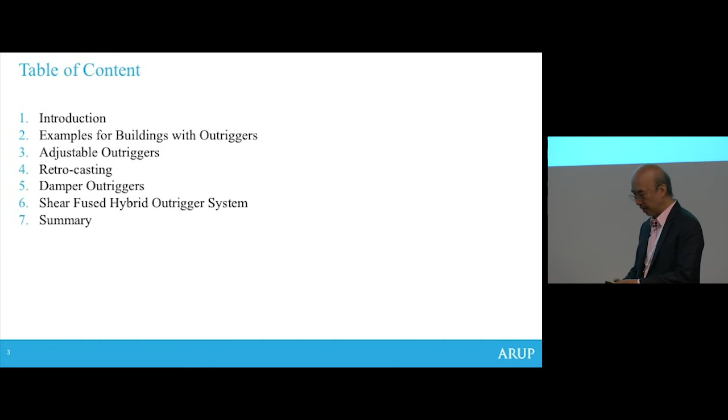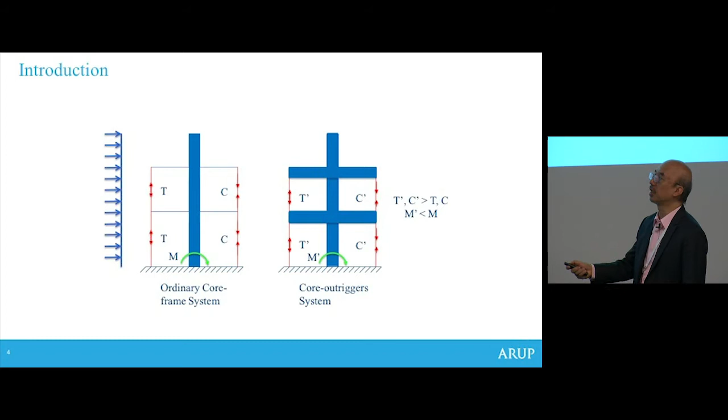This is what outrigger means in the case of a core. You apply a lateral load, and this creates moment, shear force, tension and compression. If we have a very stiff arm, increasing the stiffness of these beams, we'll see an increase in tension and compression force, and the moment in the core will be released.

With this system, we can mobilize the perimeter structure and at the same time reduce the moment force in the core, allowing us to reduce the core size and control and increase stiffness. You can see the force and moment relationships in this simple diagram.

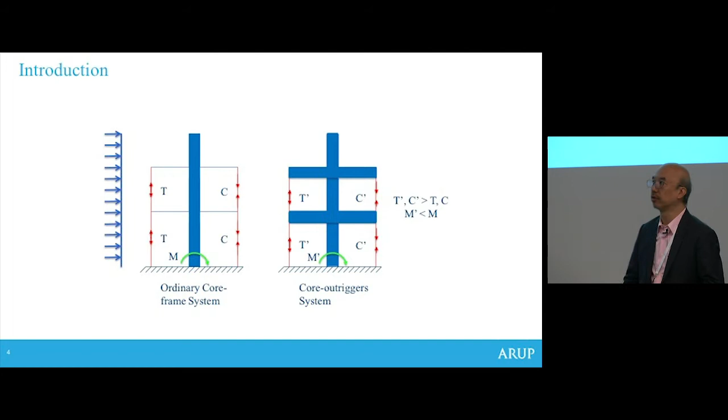This is the moment curve for the original system—if you don't have an outrigger, just a pure cantilever. With a cantilever and coupling from the perimeter structure, you actually reduce the moment in the core. This line is parallel—you can't make it unparallel, it stays parallel.

You have M1 and M2, and this is the simple equation showing why the moment at the base of the core is reduced by the amount M1 plus M2. You can consider whether you want multiple outrigger systems along a tall building, with M1, M2, M3, M4, M5. The total base moment should be reduced, but it cannot ideally go down to zero.

We also need to think about whether the system should have 2 outriggers, 3 outriggers, and what the stiffness of the outrigger should be. The stronger the outrigger, the larger M1 or M2, meaning the amount of reduction will be greater. But putting more investment into the outrigger means you might need a thicker core. It's always an optimization study, depending on requirements.

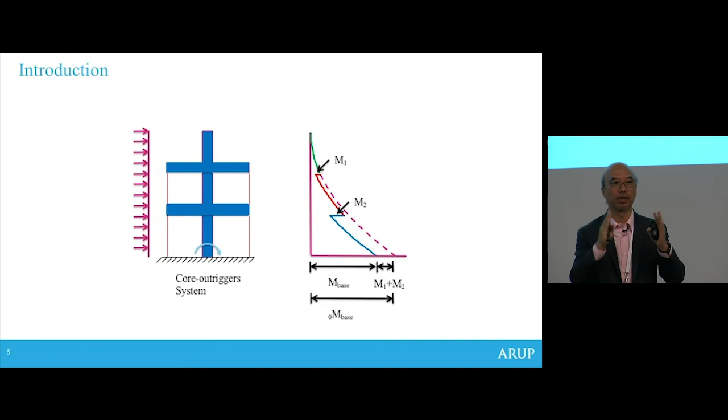Sometimes you want a mega column—a stronger column—to reduce the core. You want to control stiffness through the perimeter structure, but keep it to a minimum. This means you can adjust so the outrigger isn't very stiff, resulting in a thicker core, but the perimeter structure ends up slightly smaller in dimension.

For example, a lot of past studies discuss the location of the outrigger—what's the ideal location? Probably 1/3, 2/3, or whatever. But in reality, it's not a structural engineer's choice—it's always commercially driven, typically located at a refuge floor or mechanical floor.

So my previous research wasn't about where to put the outrigger, because that's been studied before, and with my experience, it's not a structural engineer's choice anyway. My study instead focuses on what is the best form of outrigger.

This is a control of a double-story high, 13-meter long span structure from the core to the perimeter, 4.2 meter floor to floor height. So it's double-story high. This is typical, but sometimes for some structures we actually have a triple floor, to make it much stronger. If you have a one-story high, the answer may be slightly different, but the outrigger will not be very strong. So for this one, it's this geometry, this constraint condition.

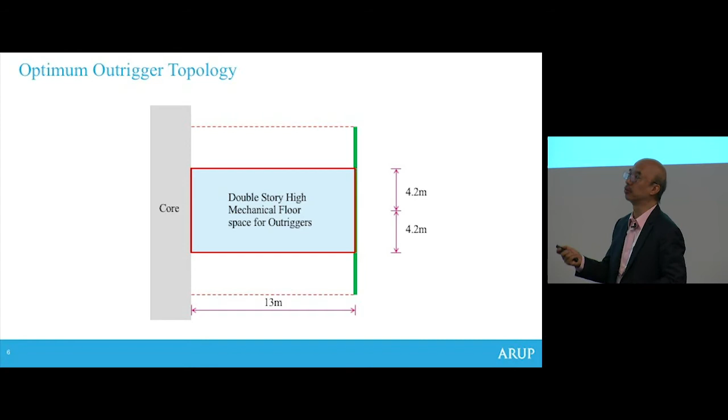And then I study a couple, 1, 2, 3, 4, and also 5 and 6 and so forth. But what I'm going to show, if you look at the paper, basically a study that for this one is probably in terms of material the minimum. In terms of stiffness it's not the strongest, but in terms of strength it's the strongest.

It's just because for C and D, basically this is like a dummy. I just want to show it's like a dummy. For C and D, basically all the focus, the failure are only on this member. The utilization on the other members are very low. So basically, although we can have a stiffer structure, in terms of total utilization of material, they are not.

Unless we adjust the size. I'm using a uniform size for this study.

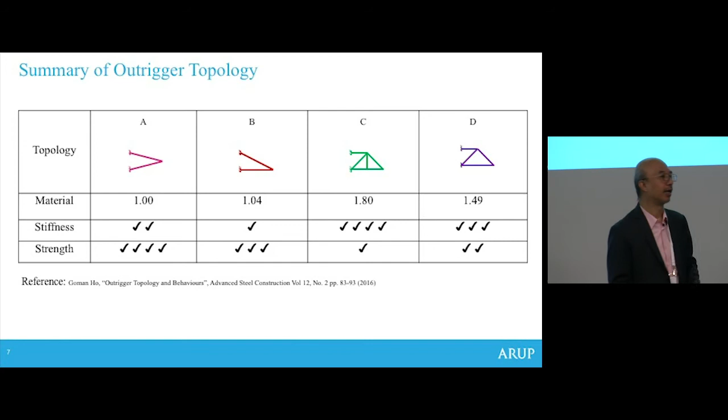But sometimes in the wind control condition, which I think will be probably most tall buildings in Australia, what you're looking for is a very stiff outrigger, because you don't have a seismic consideration. But in seismic regions, sometimes we need to struggle between whether we should design for wind and use a very stiff outrigger, or use a flexible outrigger - what you call flexible, or soft sometimes. And this is always a choice of the engineer and also the condition.

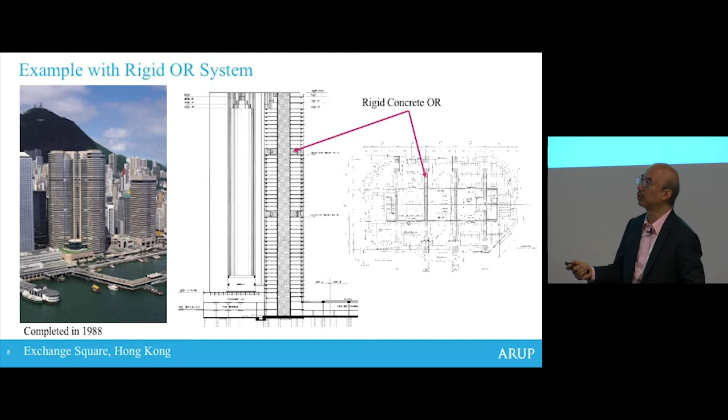In terms of rigid outrigger, this is one of the examples - we have done Hong Kong Exchange Square. It's a concrete structure, and we have a core wall, and also a concrete outrigger. It's a rigid arm, like a wall - a one-story wall, complete wall. We will leave the opening for access, because this is a mechanical floor, so people need to walk across. This is what I call the rigid outrigger system.

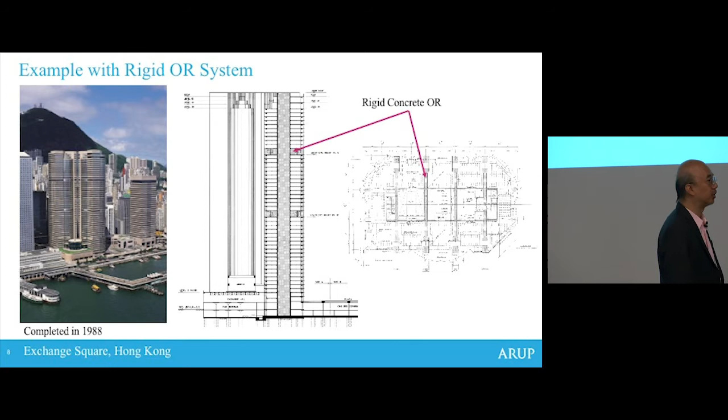And then we have another one, which is a single-story high flexible system, used in the China World Trade Center in Beijing. Beijing is an area with high seismicity - about 0.2G at a 475-year seismic event. This building is 300 meters tall, and basically wind will control a bit, and also seismic will control the bottom. So what we want to do here is control the interstory drift as a requirement in seismic areas, but we don't want a very sharp or sudden change in vertical stiffness and horizontal stiffness, because an outrigger system causes a sudden change in stiffness, which is not ideal in seismic areas.

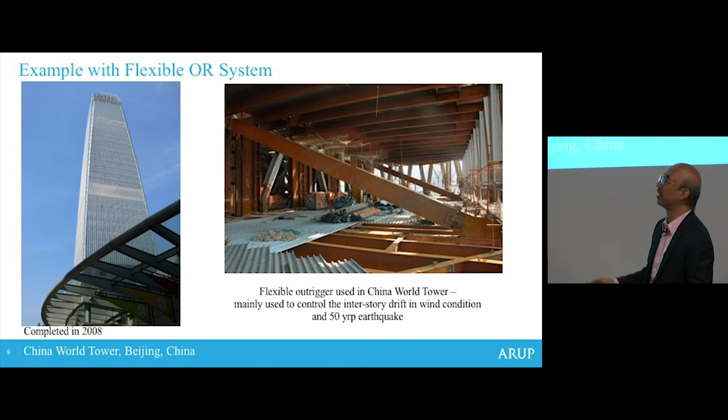And also we have other flexible systems - by concrete, done by Thornton Tomasetti in Petronas Towers. Basically they cast the beam, and then allow it to continue construction, and then after topping out, they cast the column, so that it increases the stiffness. This is one way of doing it, but I would still call it flexible, because the beam, in terms of being rigid like a wall, is still not very stiff.

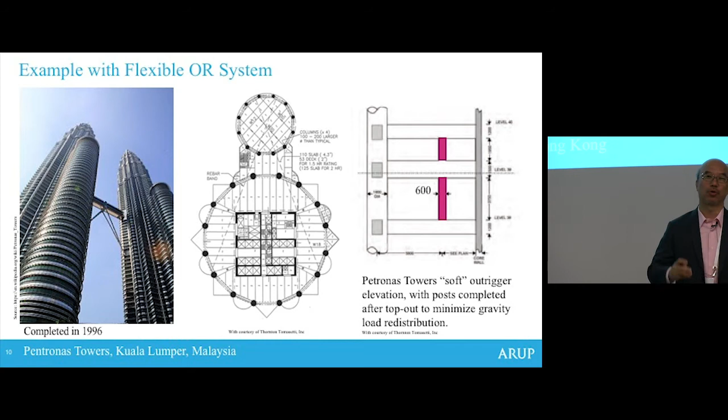What they need is probably to control the stiffness. Another reason previous projects added a column later on is because the tower's perimeter structure and core will shorten in different ways, what we call differential shortening. It's always a debate on whether we should account for all this axial shortening in the design, or whether we should find a way to release it.

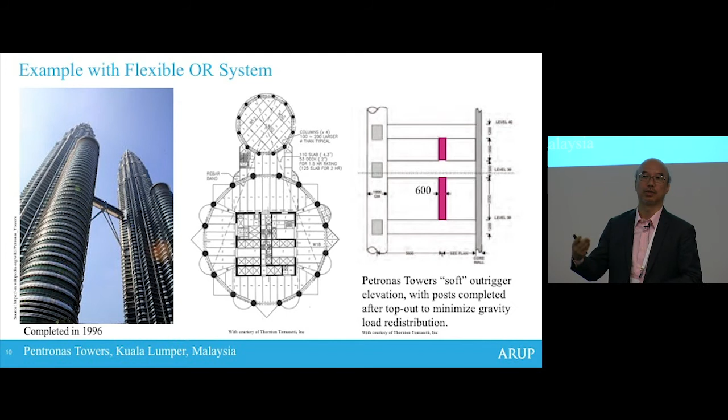So for some structures we can account for it, but for others we decide to release it. The Cheung Kong Center is a 283-meter tall tower in Hong Kong, very strong in wind, and we don't consider seismic loading. The client wanted very fast construction, so everything is composite with concrete-filled tube, completing 9 days per every 3 floors - this kind of construction speed.

So what we're going to do is apply what we call an adjustable outrigger. From this project we learned and experienced how the floor and core work using a jump form, which we limited to not more than 12 stories ahead of the floor. But up to the outrigger floor, we find the core slows down because we have a lot of welding and embedded steel and so forth. We'll tell you how we accommodate this in the next project.

For this project we use an adjustable outrigger. When you construct the outrigger and then have differential shortening, usually the perimeter will shrink more. That means there will be lock-in stresses in the outrigger, so we are trying to find a way to release this lock-in force.

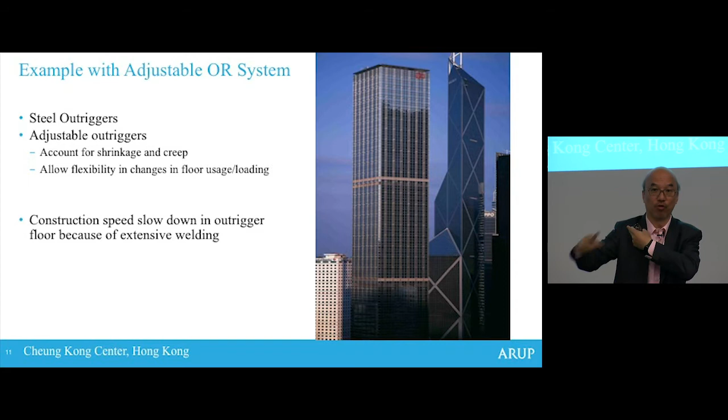Also in our calculation, it shows the lock-in forces are equivalent to the same amount of wind force. That means if we take it into account in the design without releasing it, we are doubling the force on the outrigger side. That's why we decide to release it.

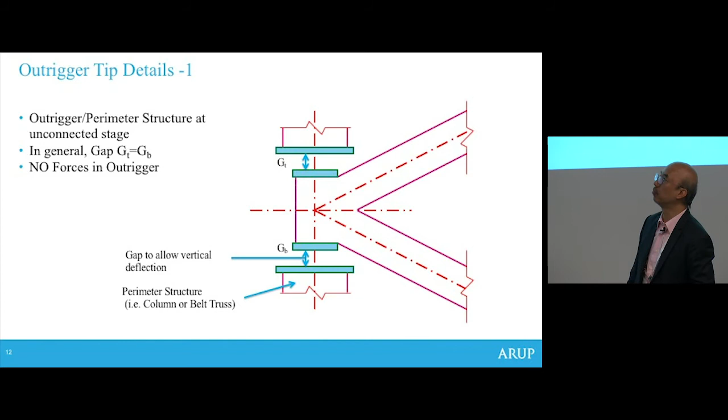To release it, we introduce an adjustable zone - this is the gap in the outrigger, and this is the belt truss, or it could be a column. So we provide a gap, and then we put steel plates in during construction.

Now up to a certain stage, the designer decides whether to connect the core and the perimeter during construction. For probably the first 30 to 40 stories, basically we don't need to connect them because the core is stiff enough to take all the load.

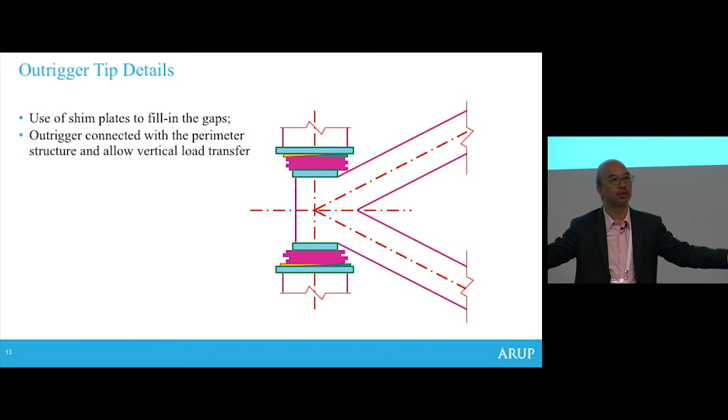But higher up, we start to use shim plates so that the core and the outrigger start to work together for strong wind during construction. After that, we put strain gauges in the outrigger to measure the strain so we know the stress and the forces being locked in the outrigger.

We track and monitor these forces up to a certain amount, and then when we decide we need to release it, we release the plate. Once we release the plate, the gap will change - the gap on the top and bottom will change.

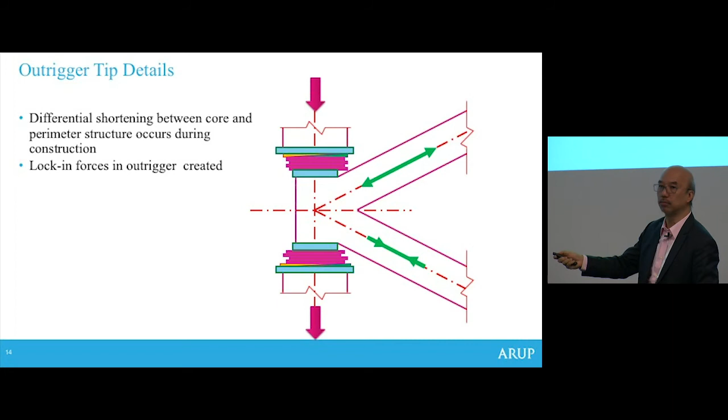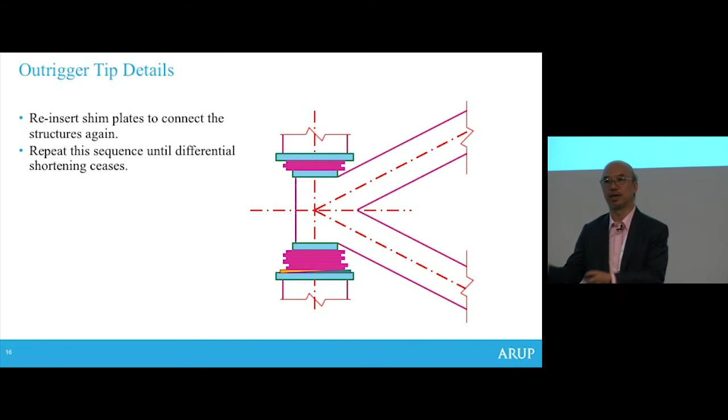Because it's shortened more, and this is elastic, it will spring back a little bit. After that we have a different size of gap, and with this gap we put in another shim plate and continue the process up to the end of construction.

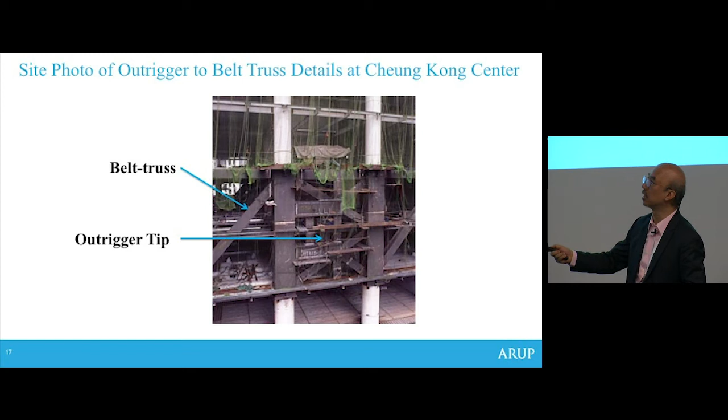This is a construction photo showing the belt truss, and the column where the outrigger doesn't directly hit the column because the column is relatively small for this project. We connect to the belt truss, using it to distribute the force into the perimeter beam. You can see the connector here, and this is the flat jack we use, and this is the strain gauge - you'll see how we put the steel plate in and so forth.

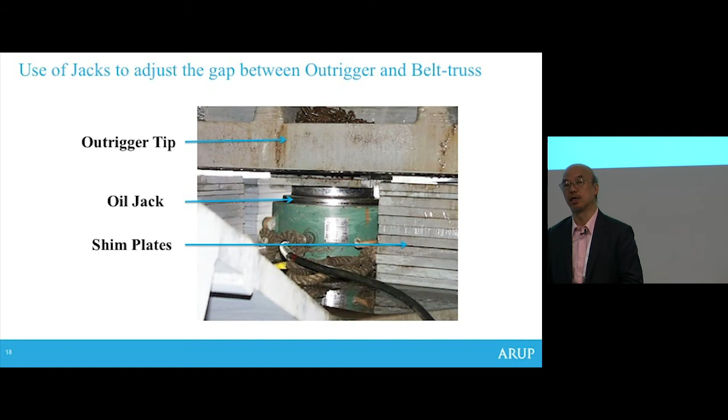The beauty of this one is we can use it to adjust the outrigger during construction up to the end, and also in case of change of use of the building or change in loading later on, we can still adjust it. After construction, we will block it with fire protection and so forth, but by means of removing that protection, we can still adjust it during the lifetime of the building.

As I said, in the Cheung Kong Center, we found construction was slowed down at the core wall and at the outrigger floor. So in IFC, we learned from that experience and wanted to accelerate the construction progress.

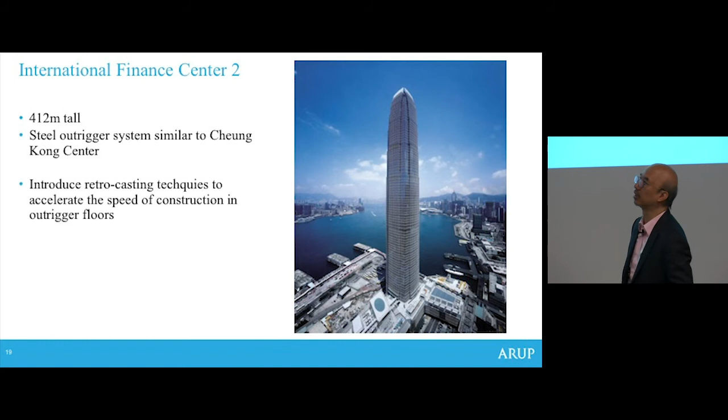That's why we used retro-casting technology. We build the core up to the outrigger floor, building half of the core, then continue the core by jump form. Using this method, it creates a notch in the core, but the core is still stable — we calculated the thickness requirement and so on. After that, we put the outrigger, assemble it on site, and slot it into the notch, then cast with concrete and cover it up.

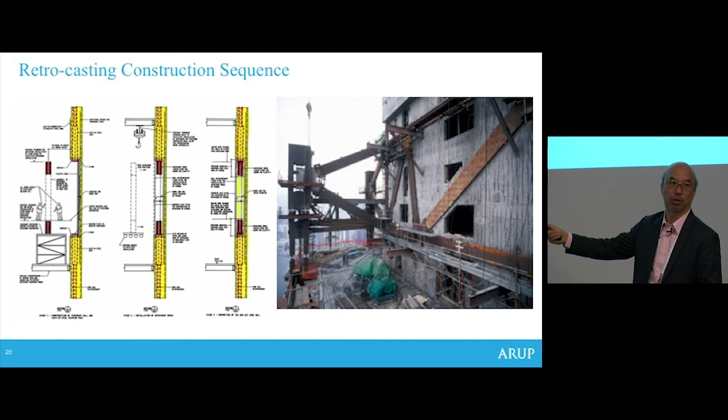This photo shows the notch of the core. We put the outrigger inside the core, then cover it with concrete, so it still remains as a whole complete core. Here you can also see the outrigger and the mega column, and this is the adjustable outrigger slot — the same adjustable outrigger concept applies to this project.

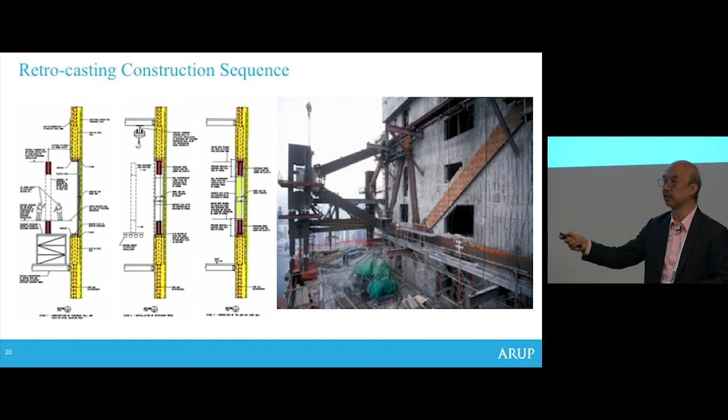These two examples I showed relate to construction and what we call a rigid outrigger — a very stiff outrigger, used to control wind. But besides this rigid issue, in cases where we have both seismic and wind loading, as I said, we don't want the outrigger to be too stiff. For wind, we want it stiff.

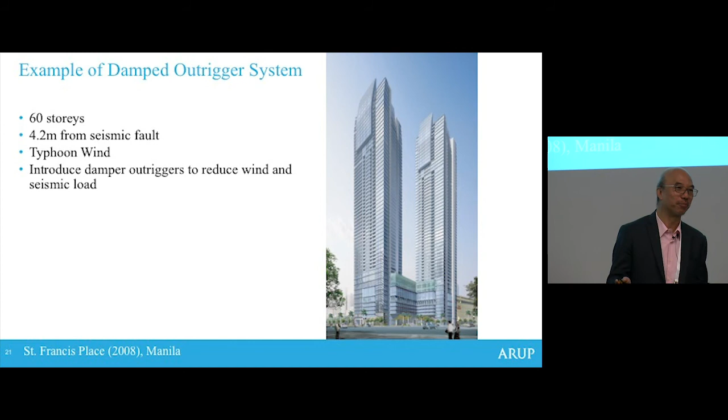In the case of Manila, where we have very strong wind and very strong seismic activity, we have another problem. For St. Francis, we have a twin tower with two towers placed very close together due to the limited site area. This caused a lot of issues during wind due to the wind vortex shedding issue.

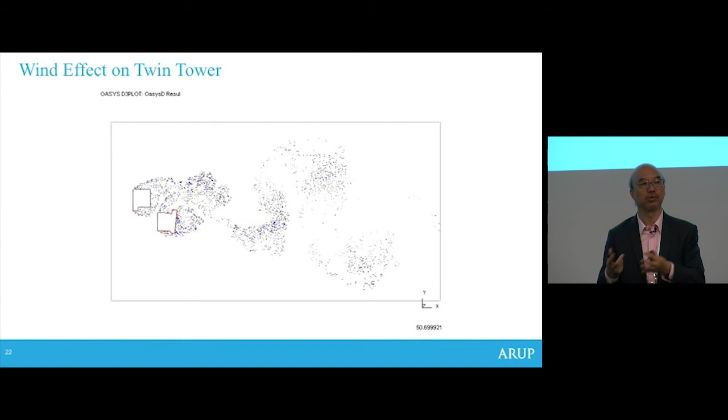To overcome this, and to make it more economical, we added additional damping to the building. How do we add additional damping? We need to maintain the stiffness and control the drift, but also add damping. So we decided to use what we call a damper outrigger — an outrigger with a damper put at the tip, because at the tip is where you get the displacement, and you can use that to add additional damping to the system.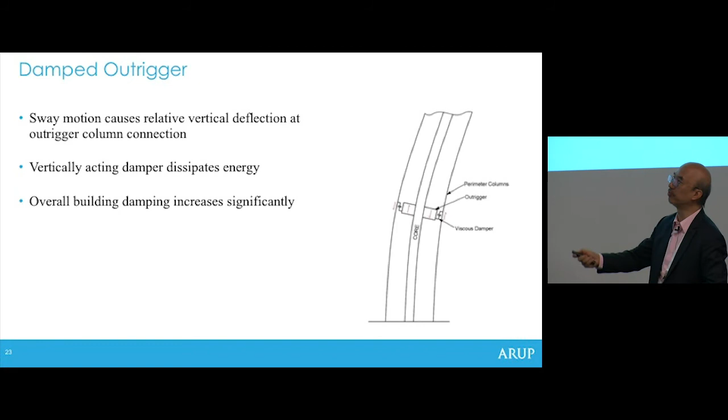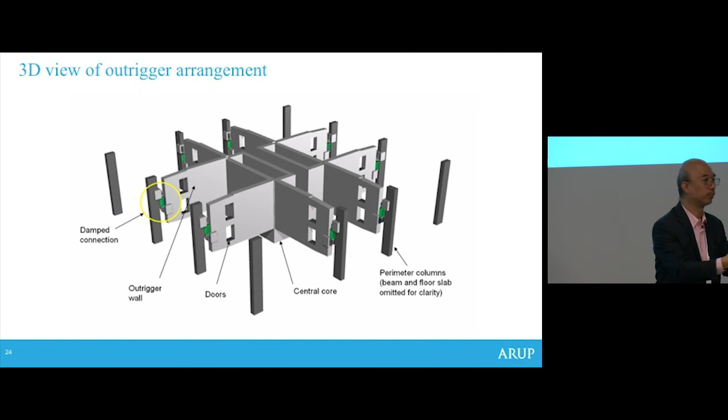Again, this damper outrigger's good thing is it generates damping. The trade-off, not necessarily a bad thing, depends on the stiffness you require.

Sometimes this kind of viscous damper or viscoelastic damper does soften a bit. So in a case where we have wind control of the building, but we need to account for a 2,500 year earthquake event, what are we going to do?

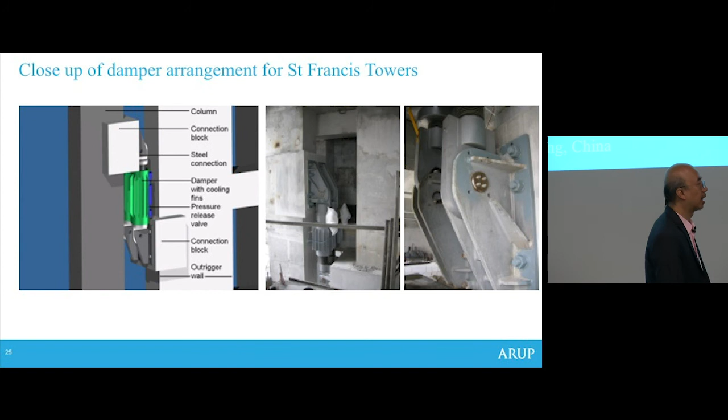This is always another problem we have for a tower, what we call the Chongqing Raffles City. This is a project with 6 towers together, and actually each tower has 2 or 3 towers, so it gets a little complicated. We have T1, T6, and then T1A, T1B, T1C. But I'm not going to talk about the structure in detail, or the conservatory due to time. We'll just talk about the system we use for this tall building, which is about 350 meters tall.

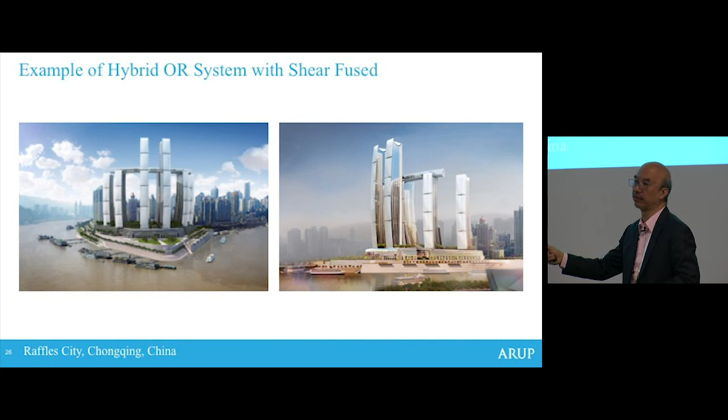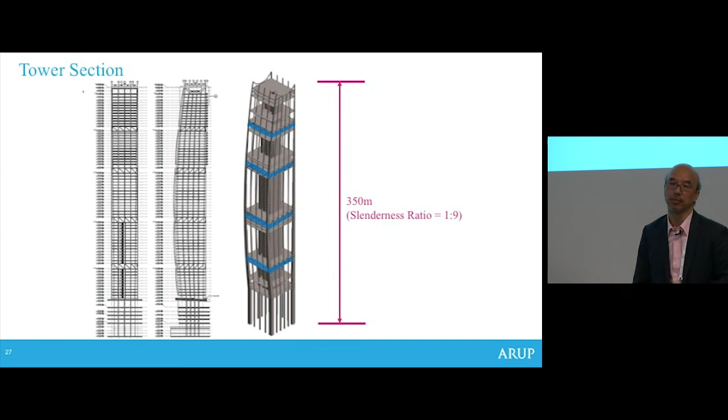The building is a bit curved on one side and straight on the back, with another tower attached to it. It's 350 meters up to the crown, with a slenderness ratio of 1 in 9. Very challenging project because of the slenderness.

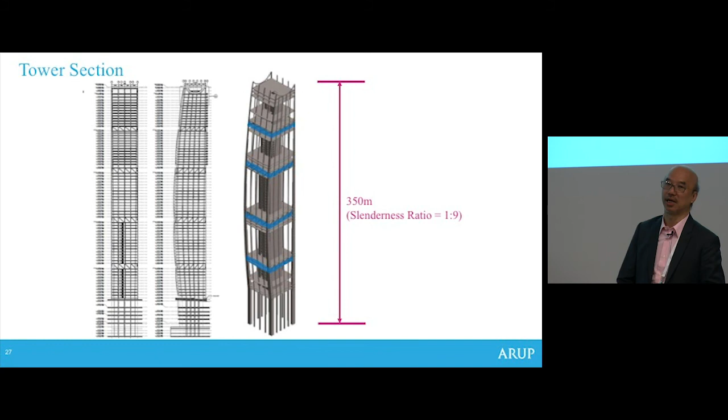Chongqing does have wind, but not extremely strong. We do have earthquake, also not extremely strong. So we need to maintain the stability of the structure as our first target.

Basically, the system is a core and mega frame, with 4 mega columns on the edge, and also some intermediate columns. For the intermediate columns, we have released the force so that the vertical load is released in every transfer truss, pushing all the load to the mega columns at the 4 corners to resist the uplift.

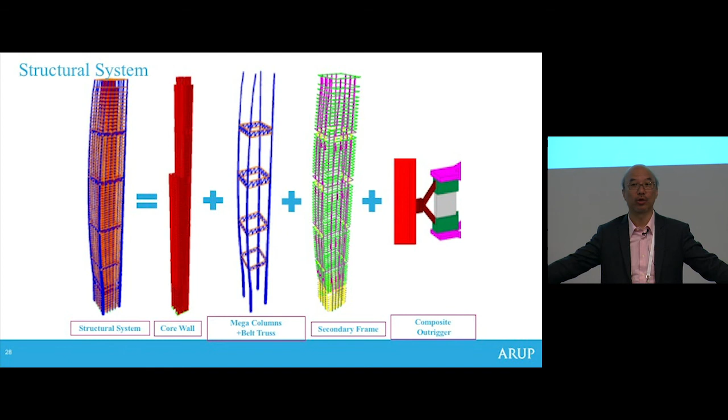And then we have what we call the composite outrigger. Chongqing is what we call a second-tier city in China. The economy is not extremely good, so the client did not want to use a lot of steel, and to reduce construction cost, we wanted to use concrete.

So for the concrete outrigger, the issue is how we're going to control the cracking of the outrigger, etc. We developed a system to reduce construction cost while protecting the building. So we came up with this hybrid system: a concrete outrigger with a steel tip, with a steel connection, which we call a shear fuse.

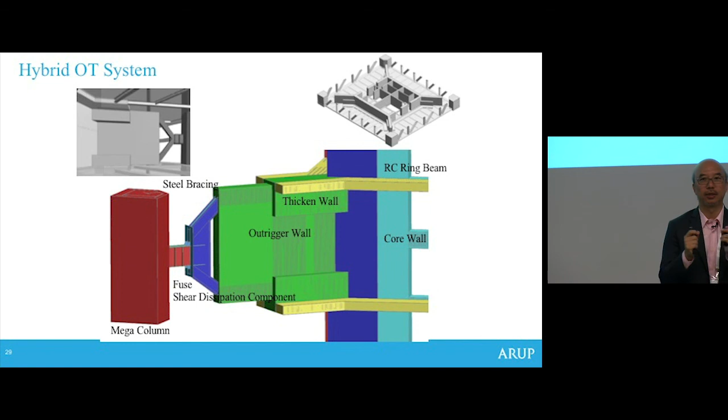Basically, what we do is specially design the tip so that it is elastic during wind, but it will start to yield in a 2,500 year earthquake event.

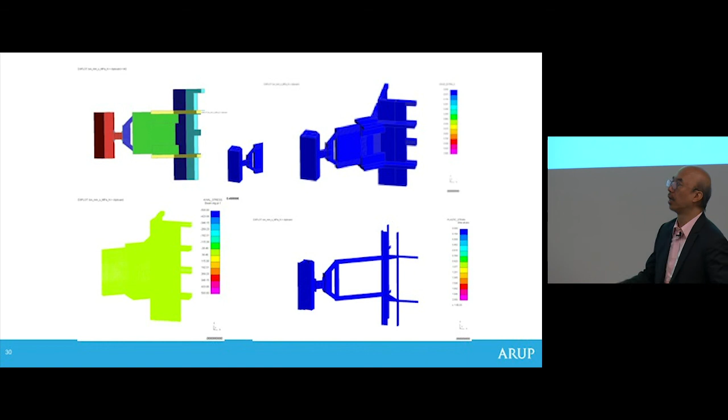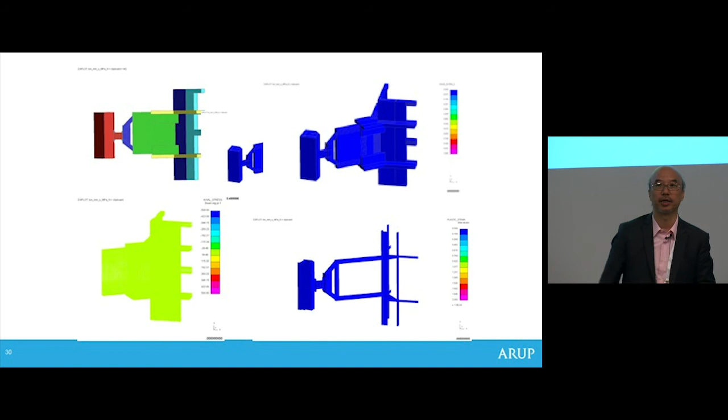You can see the deformation here, and this is the concrete strain, which basically controls the concrete wall to have an existing cracking pattern. At the same time, for this fuse, it starts to yield and generates damping, dissipating energy in order to protect the building.

We've done a lot of tests with various geometries and so on. You can see the hysteresis behavior of the fuse is very nice, and we got approval, as well as a patent in China.

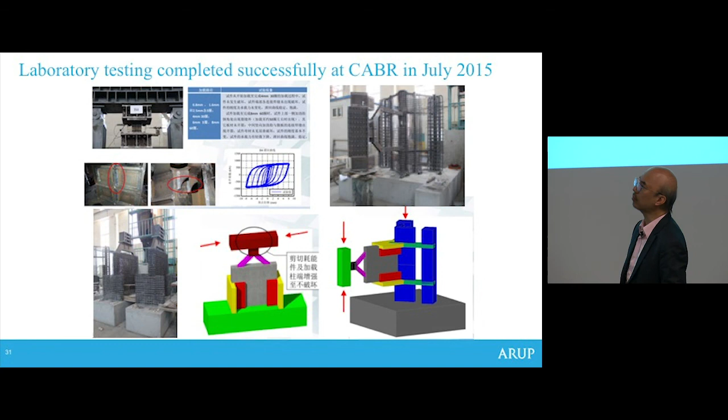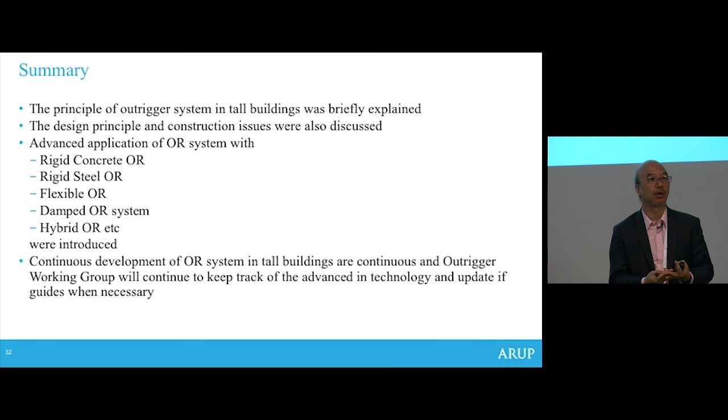So in summary, I have covered the various kinds of outriggers in terms of design and construction, and also presented the damper outrigger, as well as a hybrid outrigger with a shear fuse.

All of this has been tracked through my work in the Council of Tall Building and Urban Habitat outrigger working group, where we produced a document on this. The first edition of the Outrigger Design for High-Rise Buildings was published in 2012, with about 5,000 copies printed, and it sold out by around 2015.

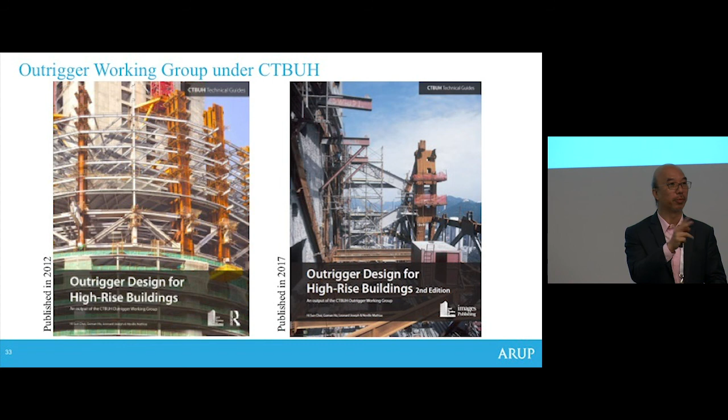So we discussed whether we should reprint it or update it, and we decided to update it. Everything I mentioned previously has been incorporated into the second edition, which was just announced and launched on Monday in Sydney during the conference.

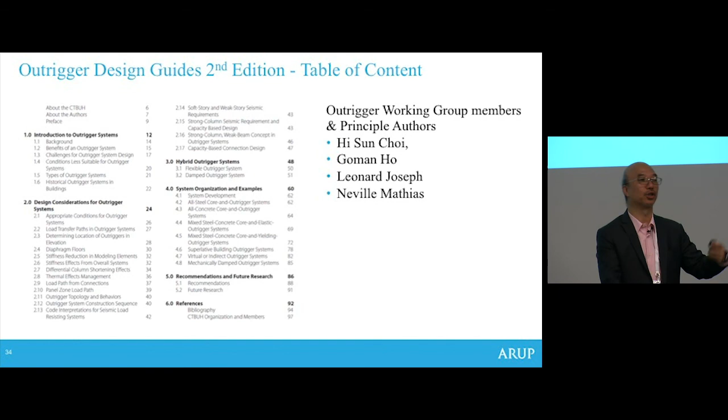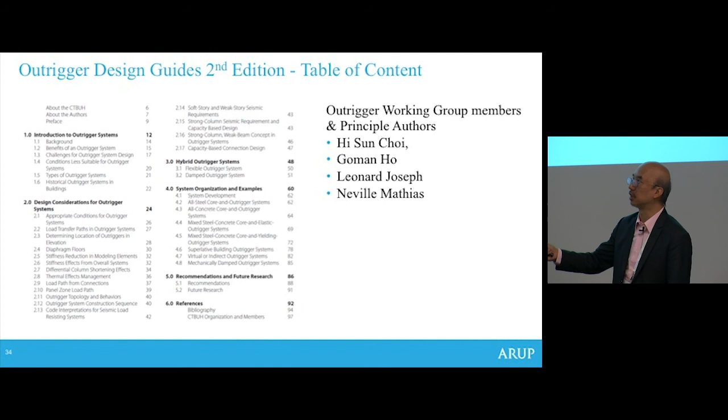So if you want to know more about outrigger design, you can refer to this code of practice. The major changes are in chapters 3 and 4. These are the members of the Outrigger working group for this booklet. Okay, thank you.